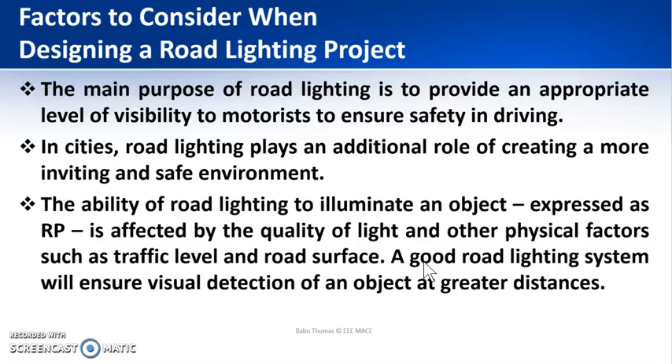That is being defined by the factor RP. A good road lighting system will ensure visual detection of an object at greater distances. While approaching in a vehicle, the road should be clearly lit so that safe driving is made possible. That is the main function behind a good road lighting project.

Now we will see the various factors. Before that, these are just two pictures. This is using a sodium vapor lamp and this is using an LED light. The same roads are being lit. Here we can see that LED is a new technology which is being utilized in many of the new projects in street lighting, and sodium vapor lamps are being replaced by LED lamps.

A clearer visibility and a good color rendering index is being provided by the LED lamps. You can see the effect of both the lights in both cases. Here it is having a good white light, but this is having a yellowish tint.

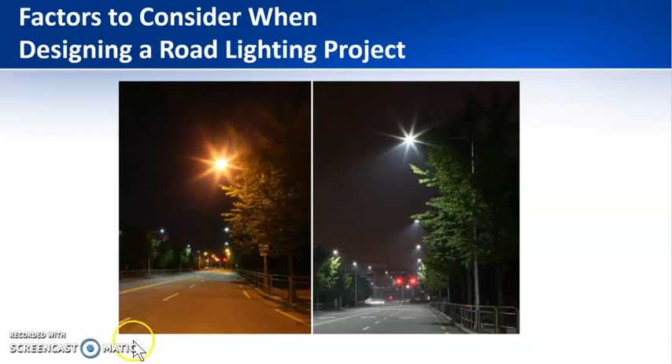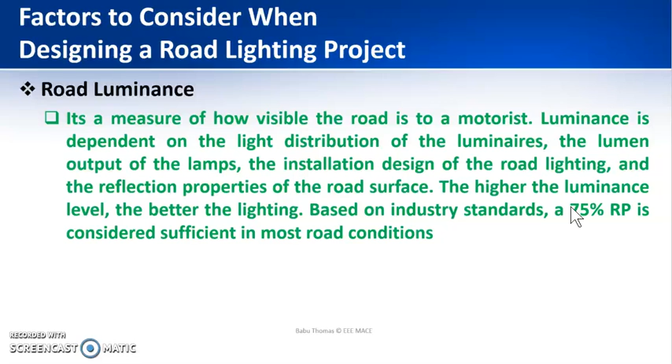The first factor we need to consider is the road luminance. It is a measure of how visible the road is to a motorist. Luminance is dependent on the light distribution of the luminaires, the lumen output of the lamp, installation design, and reflection properties of the road surface. Higher the luminance, better the lighting, and a 75% RP is considered sufficient in most road conditions. So road luminance is how visible the road is to the motorist.

The next factor is uniformity. It is the even distribution of light on the road, and it is defined as overall uniformity and longitudinal uniformity. What is meant by overall uniformity and longitudinal uniformity we will see in the next slide. A good uniform light distribution will ensure that all the spots and objects on the road are clearly lit and visible to the motorist. The industry accepted value of overall uniformity is 0.4.

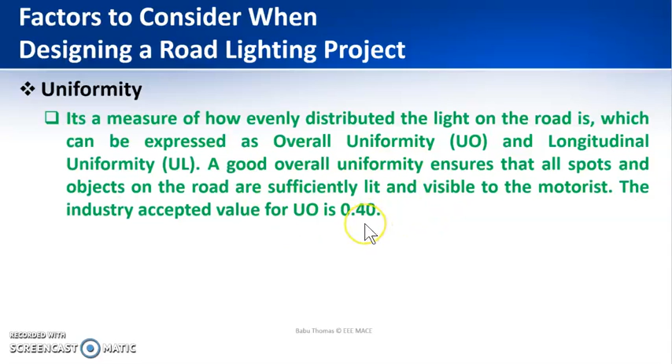This is showing two pictures in view of overall uniformity. The left side picture is having a good overall uniformity when compared to the right hand picture. You can see that when the road is clearly lit, all the objects on that particular road should be clearly visible. There should not be any dark spots.

You can observe that this particular box is visible in the case of a good overall uniformity, but it may not be visible if the uniformity is lower. An open manhole, road excavations, sharp objects on the road, or people crossing the street won't be visible if your overall uniformity is lower.

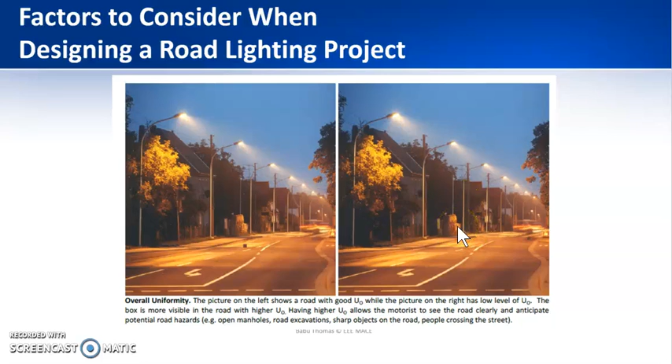Next we will see longitudinal uniformity. Longitudinal uniformity ensures comfortable driving conditions by reducing the pattern of high and low luminance levels. That is, when you are traveling on the road, if one of the street lights is off or alternate street lights are off, then you will see a zebra effect. Some part is highly lit and some part is poorly lit, so a zebra effect is created.

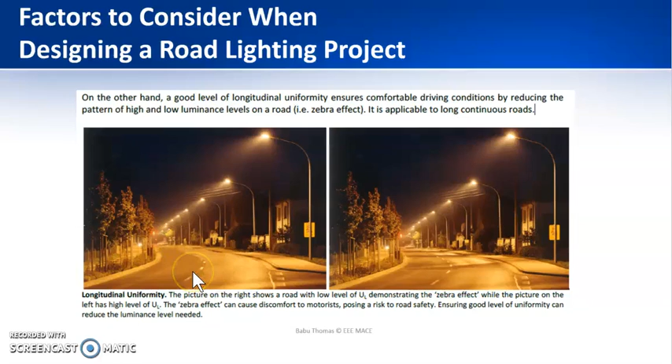Again two pictures: this is with a good longitudinal uniformity and this is with a lower longitudinal uniformity. Here you can observe the zebra effect, that is the dark shades coming on the longitudinal parts. But if a good longitudinal uniformity is there, you will not see any zebra effect. You will see a continuous uniform lighting distribution throughout the road.

The next factor is glare. Glare we have already discussed in interior lighting. It is nothing but an irritating or blinding sensation when the brightness of the light exceeds the adaptation level of the human eye. It produces discomfort and reduces road visibility. You can observe a high beam light coming to your eyes while you are driving. That is nothing but glare.

Higher brightness of light which comes to our eyes, exceeding the adaptation level of the human eye, is nothing but glare. It is measured in terms of threshold increment. That is the percentage increase in required luminance to compensate for the effect of glare. That is, in order to avoid the glare, you need to compensate with extra light.

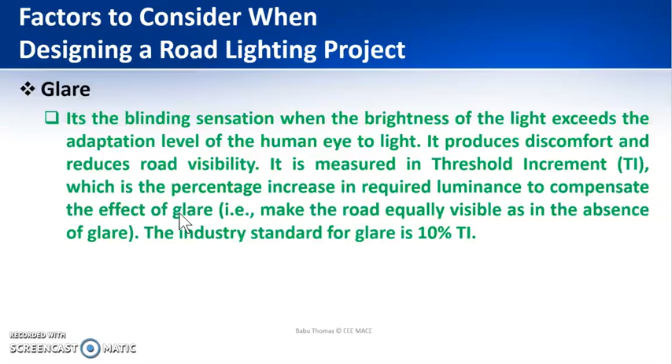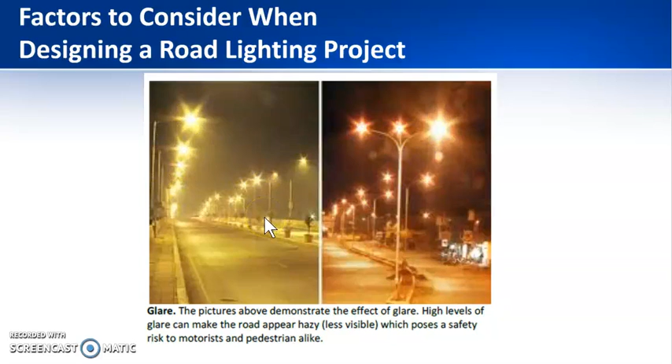So that is being given as a factor of threshold increment. So this is just showing the two pictures of the effect of glare. You can see that the glare from the two street lights on both the images is very high. So that poses a risk to the motorist and the pedestrian who are moving under the light.

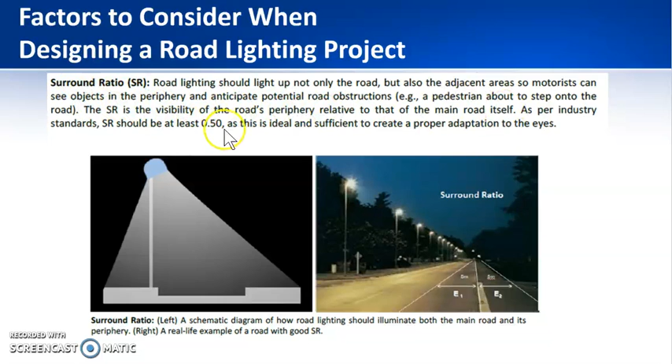So the SR is the surround ratio, which is the visibility of the road's periphery relative to that of the main road itself. And it should be at least 0.5. Next factor is the color rendering index. It is the measure of the ability to reproduce the color of an object. Sunlight or the natural light source has a color rendering index of 100. It is measured on a scale of 100. The higher the index, the better is the visibility.

So this is just showing three pictures. This is during the daylight. This is during the night time with the sodium vapor lamp, which has the least color rendering index. And this is with an LED lamp, which has a high color rendering index. So these two pictures are more matching because it has a good color rendering index. So the lighting scheme which you are choosing should have a good color rendering index.

Earlier we were using the sodium vapor lamp because it was highly efficient. But nowadays LED lamps are also at par with sodium vapor lamps, and therefore they are being replaced by LED lamps, which also have a good color rendering index.

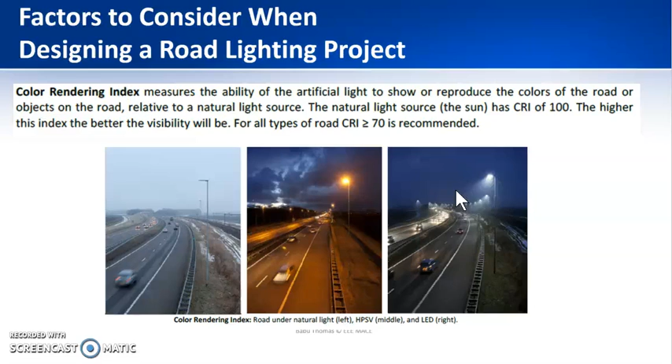Next we will see the various terminologies related to road lighting. So this is your pole of the street lamp, and from that there is an arm projecting onto the road, and this is the lamp. MH indicates the mounting height. This is the pole arm, then you have the lamp. This is the street side. And this is the pole setback, the distance by which the pole is set back. And the point directly under the lamp is the origin.

And you have these lines, 0 MH LRL and 0 MH TRL. LRL is the longitudinal road line, and TRL is the transverse road line. 0 MH means it is the first line, going through the origin and parallel to the curb. The curb is this one. And the transverse road line is an imaginary line perpendicular to the curb, or perpendicular to the 0 MH LRL. So this is the total road width.

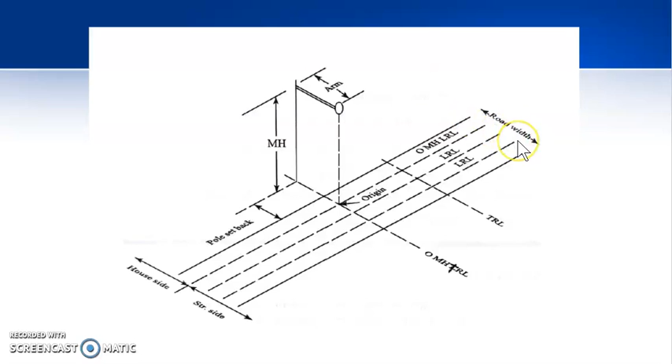So origin is the point on the road directly under the luminaire. Longitudinal road line is an imaginary line parallel to the curb. These are all the LRLs. The 0 MH LRL is the one passing through the origin. Transverse road line is perpendicular to the curb. So these are TRLs, and whichever passes through the origin point is the 0 MH TRL. In 0 MH, MH is the mounting height.

Then longitudinal distance is the distance measured between two TRLs in a direction parallel to the curb. And the transverse distance is measured between two LRLs in a direction perpendicular to the curb.

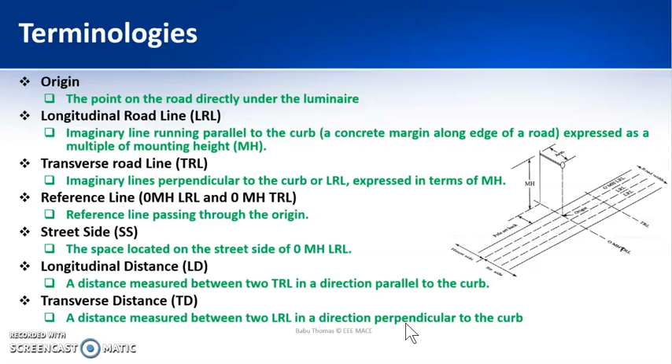Now there are various arrangements of lighting systems. So this is your roadway. You can keep your street lights on one side. This is known as a one-sided arrangement. Next, you can keep the street lights on either side, so there are two times the number of lamps compared to a single-sided arrangement. Then you have a two-sided staggered arrangement. You can imagine it as a zigzag.

The other one is the double davit median arrangement. When the road has a median, you fix the lamps on either side of the median and the roadway is lit. Next is the double davit opposite arrangement. You place the street lamps on the median and also on the other side of the road. The vehicular movement is indicated by these arrow marks in each figure.

Next is the double davit staggered arrangement. In the median, both will be kept on either side, and the other side of the road will have a staggered arrangement, moving like this, then this one, then this one. Normally we use one-sided spacing, or sometimes two-sided in the case of highways.

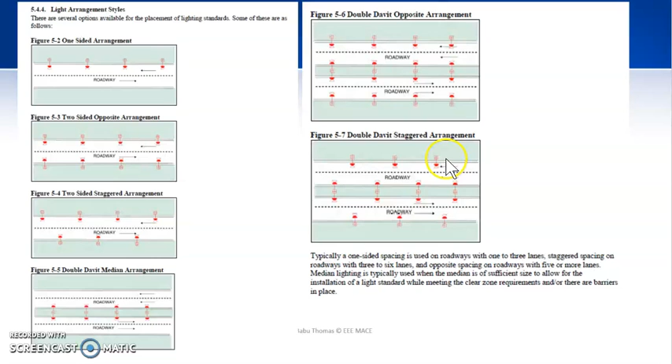That is all with the general terminologies and the requirements of a good road lighting project.